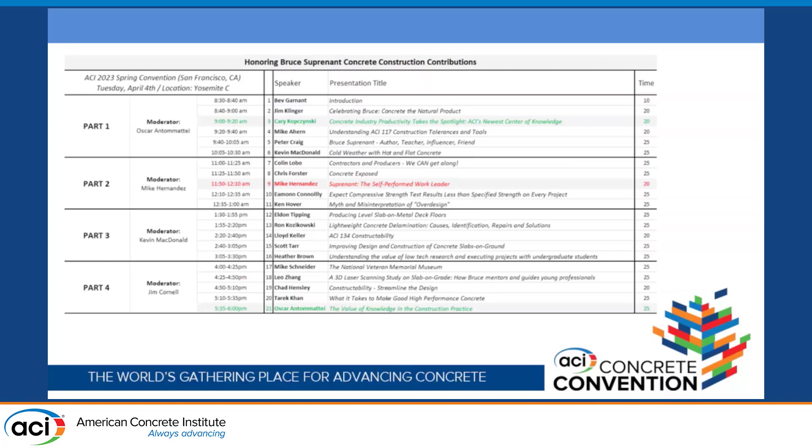We all know that concrete moves and behaves in mysterious ways, and so do careers in the concrete industry. For me, it's all been about luck. I learned early on that you always have to try to position yourself to get lucky. And the harder you work, the luckier you get.

I started out with Miller & Long Company. I worked at KCE Structural Engineers. I worked for Martin Middlebrook and Louie here in San Francisco, and then for Conco, a local contractor. Each step of the way, I was lucky to have people I was working for that had great situational awareness and excellent mentorships.

So the only regret I have, and I would tell that to any of the young people here today or the people listening at home or at the ships at sea, is not having the wherewithal or foresight to get involved with ACI earlier in my career. Everything else was all good, but that to me is of vital importance to somebody's career - to get involved with ACI and also ASCC.

Lucky again, World of Concrete 2017. I come walking into my first World of Concrete, and there's the ASCC booth, there's the classic Hawaiian shirt, and I made a beeline over, introduced myself to Bruce and said, you don't know me, we never met, but you have helped me out of so many dicey situations in job site trailer meetings. It's just unbelievable. So I just want to shake your hand and say thank you very much for what you've done for me. And then I'm not sure how it happened, but I ended up working for Bruce.

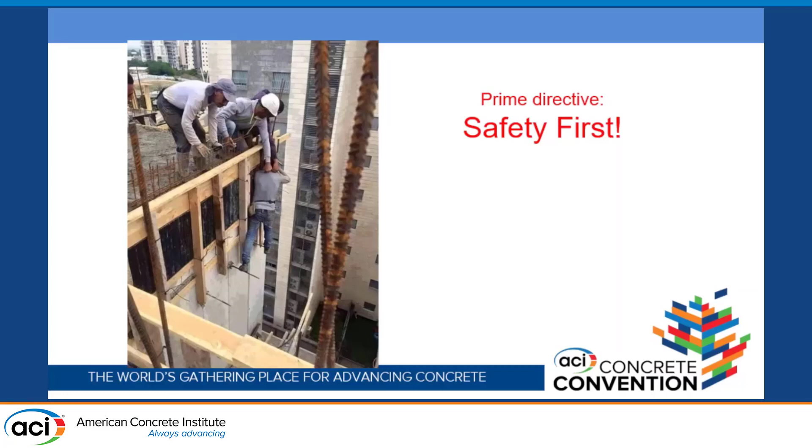Safety first. You don't ever want to be in this scenario in a concrete pour - as you can see, there's guys leaning too far over that handrail there. Have fun. Bruce always makes sure that at Christmas time we have enough Christmas cards and Christmas ornaments to go around.

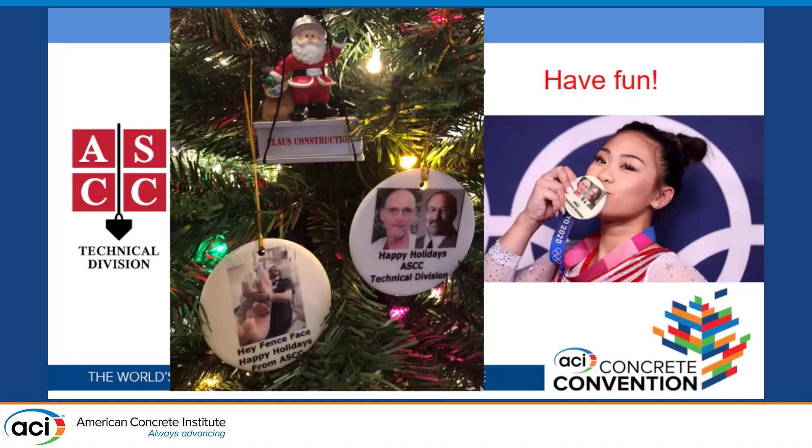Sometimes humor is at my expense from Bruce. Here I am in the hospital, I've got a spinal cord injury, I can't walk from the waist down, and the handsome face you see now is covered in blood and stitches. So what does Bruce do? I get a huge stuffed pig and a safety manual for bicycle safety. So thank you very much, Bruce.

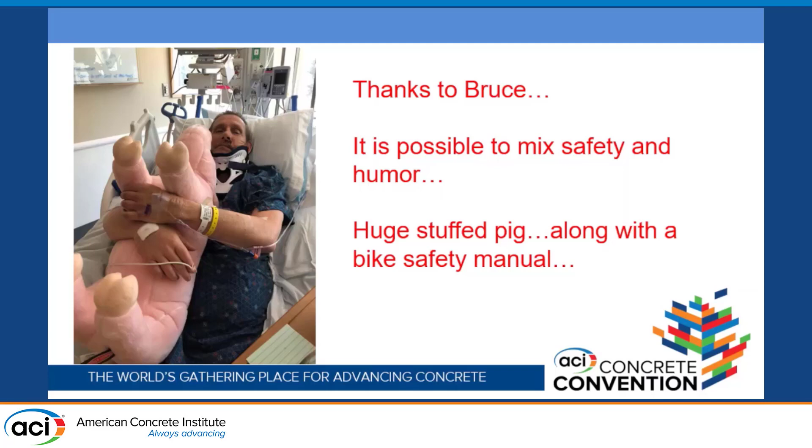It's a tough business. You never know who you're going to run into during a 10,000-yard mat pour, especially in downtown San Francisco. We're a city of inclusivity and diversity, and as you can see, all are welcome on concrete pours.

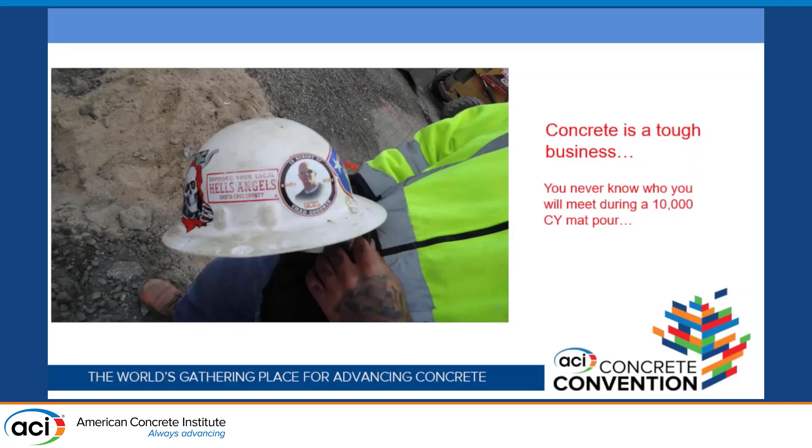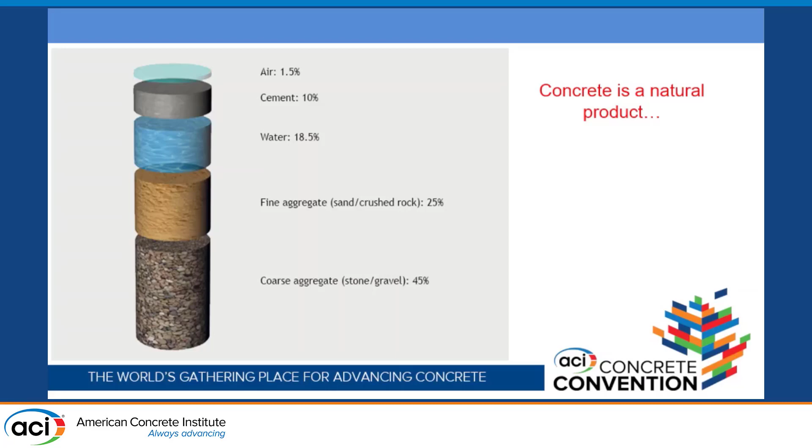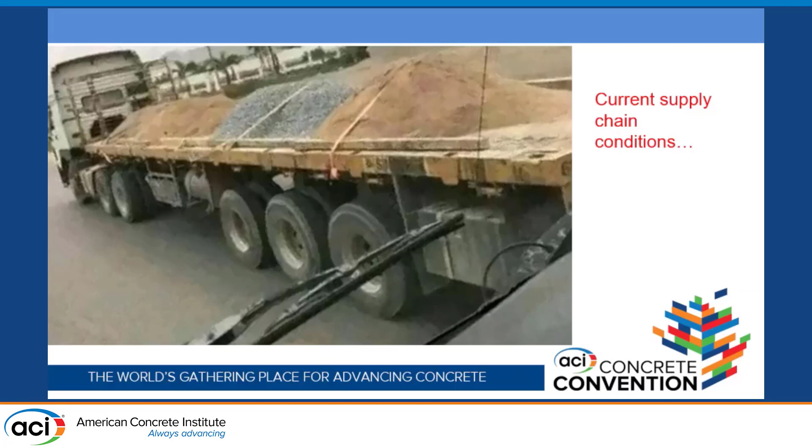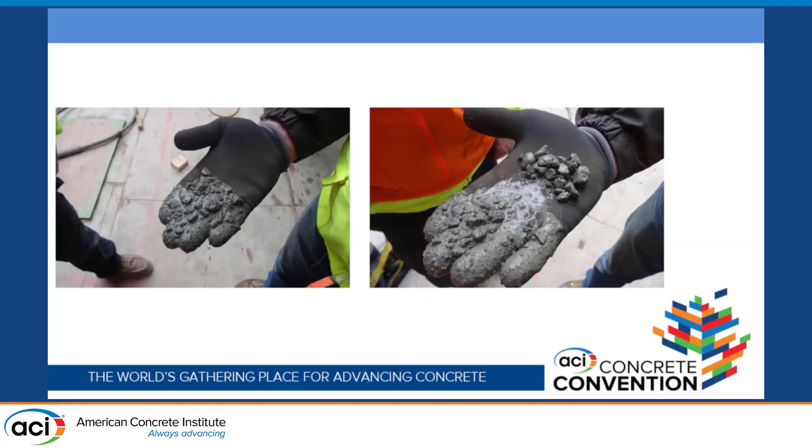Concrete is a natural product. You've got coarse aggregate, so we're recycling rocks. You've got fine aggregate, so we're recycling smaller rocks. Water, we recycle that. And then you have cement, some of which is recycled as well. So it's a natural product, quite simple. You can see in the supply chain, basically there are your constituents right there. All that's missing is the water, but on that day it was about ready to rain. So you don't ever want to be at the end of the concrete pump and find out what the constituents are by grabbing a handful and having it look like that. That's just rock, sand, water, and a little cement right there.

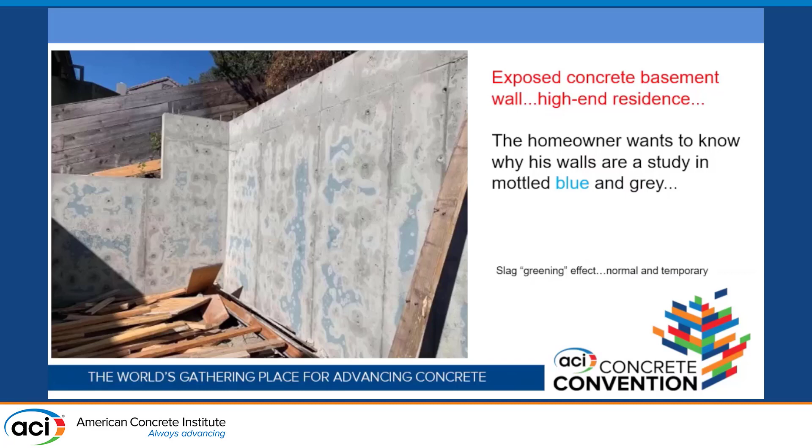This has slag in it. The first day or two you might see that on your wall, but it's going to go away. So just relax, it's called the greening effect. It's normal and temporary with this natural product.

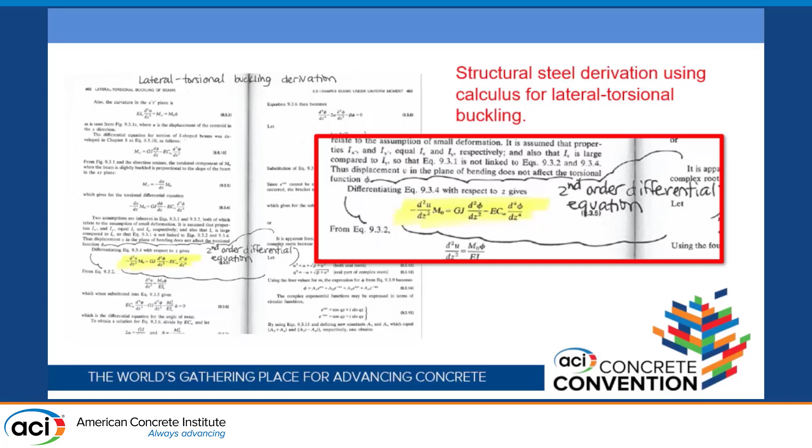For the steel guys, their design equations are pretty much all based on calculus. So here is the formula for lateral torsional buckling, it's a second order differential equation, and that's something they can do. Almost all their equations are based on calculus.

It's not that way with concrete. This was back in the days of slide rules and IBM punch cards when I was in school. Now all I can really think of is you got shear moment and a senior moment at my age.

What you got here is you take the dead load and you overestimate it by 40%. As an estimator, you try that, you get fired. You take the live load and overestimate that by 70%. Then you have some factor U, which is the strength of the building, which you usually fudge down by 15% or whatever the phi factor is nowadays, adjusted for inflation. I don't know, but...

One of the things that attracted me to ASCC was that they always challenge the system, look out for the contractor, and we help each other out. Another important thing is that we leave the party affiliation at the door when we come into a meeting. There are times other contractors here in the Bay Area are fierce competitors with us, but I can call them at any time, unless it's a job we're bidding on, of course, and we can discuss things and freely help each other out. That's one of the things we do, is we share with others.

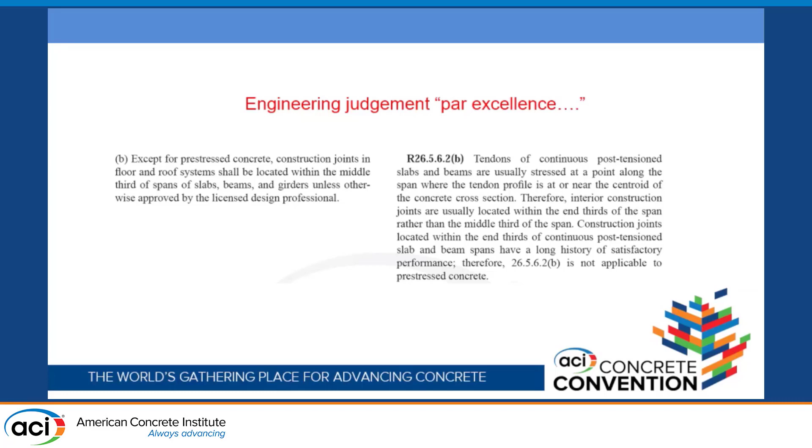We have collaboration with ACI, probably one of the better books around, for less than $100. Extremely valuable - it's got all of the legal, quality, and ASCC position statements in there. That was largely from Bruce and his contribution to that.

Here's a study in two classics, Bruce style. This is a building that maybe some of us will see here in the fall. It was a high-rise steel building, and they topped it out. They ran the building skin, which was plate glass windows, and then all of a sudden the windows started falling out, crashing into the street, and they were replaced with plywood. So that building became known as the Plywood Palace. And then, upon completion, it's a tall building like this.

So there was a big investigation, lawyers, non-disclosure agreements. Nobody was allowed to talk about it. What was going on? Was it the windows were failing? And so on. They finally came up with some kind of an idea. But then somebody said, wait just a minute, guys, there's something else going on here. And Bruce would say, 'Hey, I don't do windows, look again.' It turned out that the building was actually in danger of collapsing under wind load. And you say, okay, I get that.

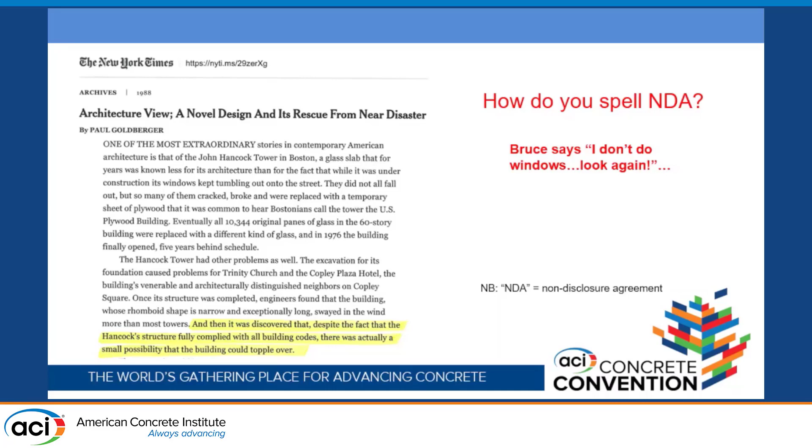It's a tall building like this. If you ever tried to carry a piece of plywood in the wind, you'll see that the wind is something to be reckoned with. Only in this case, it wasn't what you thought. That building wasn't in danger of failing this way - it was in danger of failing that way. So a lesson learned from Bruce: it's not always what you think. Always take a second look.

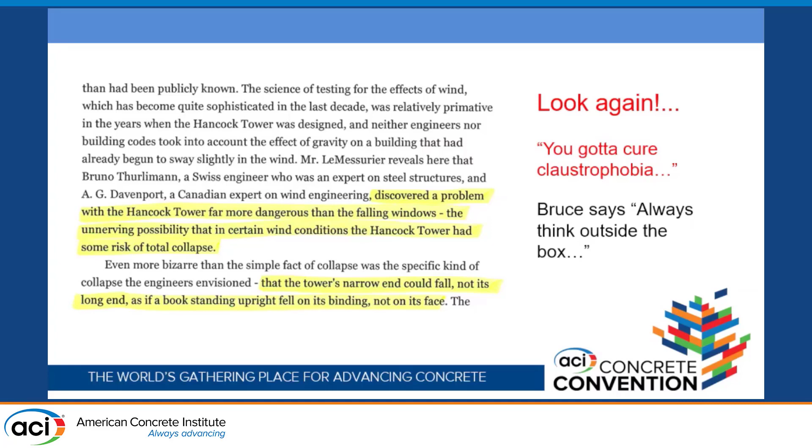A good way to cure claustrophobia, in other words, is you always got to think outside the box.

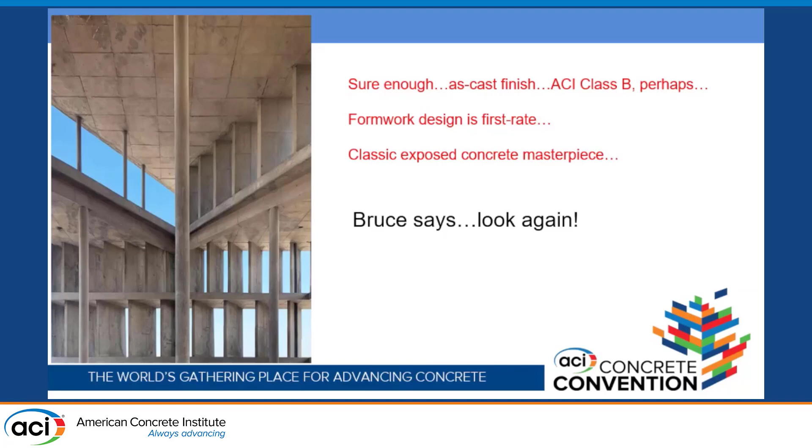Yeah, Bruce, looks okay. So let's take a look inside. Say, man, look at that - the formwork guy, his lines are all nice and plumb. You see a little bit of patching, but not much. The guy that designed this was insistent on exposed concrete, natural concrete, and he would berate the workers when they stripped because they were starting to patch the concrete. But Bruce says, no, look again.

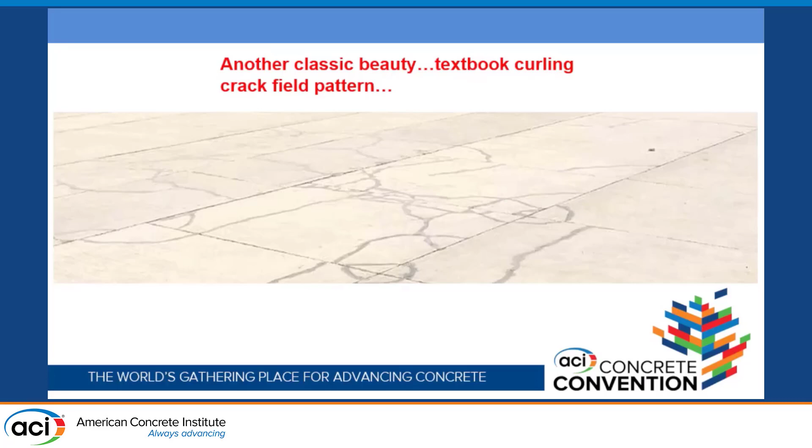What do you see? And I'm saying, well, I see this building there, Bruce. And he says, no, down here, look at that. Okay, look at this - this is beautiful, it's a classic beauty. Textbook curling, crack field pattern. All these corners here have become a cantilever and popped - all four corners. And then here, almost a perfect circle right here. You're never going to see a better example of curling in your life.

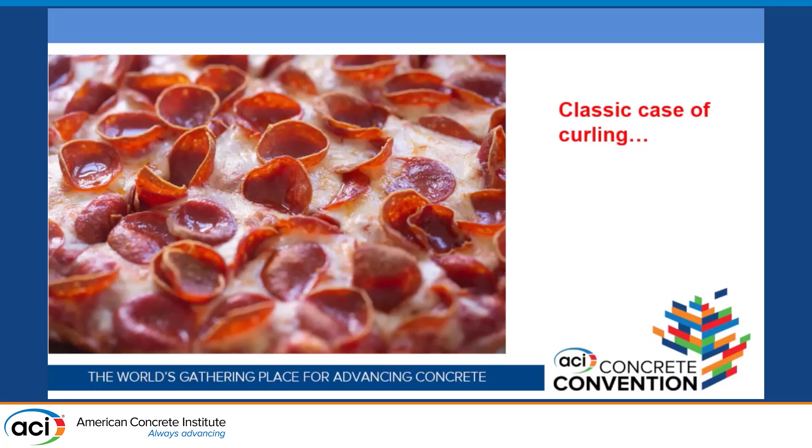And I thought, my God, what a magnificent picture. So I got in touch with the fellow - his name is Rod Rankin. He's an engineer in South Africa. And I asked him if I could use this slide in my presentation, and well, it's for the same reason. So Rod emails me back and he says, 'By the way, send my best wishes to Bruce. I've never met him in person, but I've been an avid reader of his articles on concrete ground slabs for many years.' So there's fan mail from South Africa for Bruce.

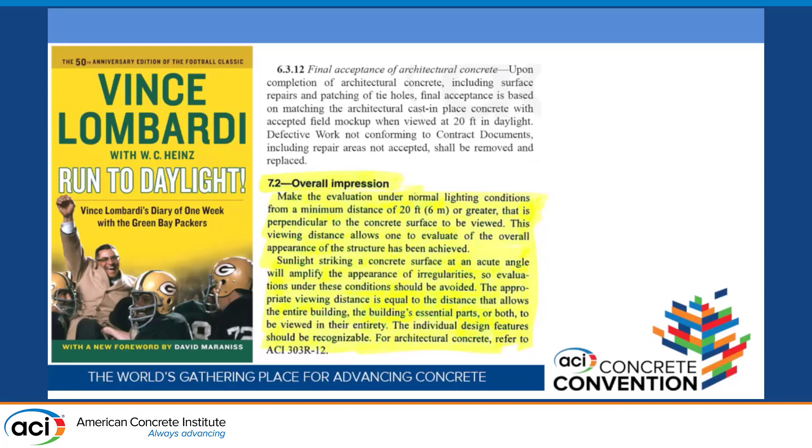ACI 301, we quote that quite often—I call it the Lombardi rule. That's for the architects and reviewers of mock-ups who like to get out their magnifying glass. Fellows, not so fast—this has got to be viewed at 20 feet in daylight, hence the run to daylight of Vince Lombardi. We quote that rule often to get people to understand this is a natural product; it's going to have a divot here and there. Get back 20 feet.

Collaboration—this is from Bruce's library, his first notes for early position statements. He was able to get people in the design offices and in the field all on the same page across all different trades. A lot of that work was eventually turned into position statements, articles in Concrete International, or Concrete Q&A, and so on.

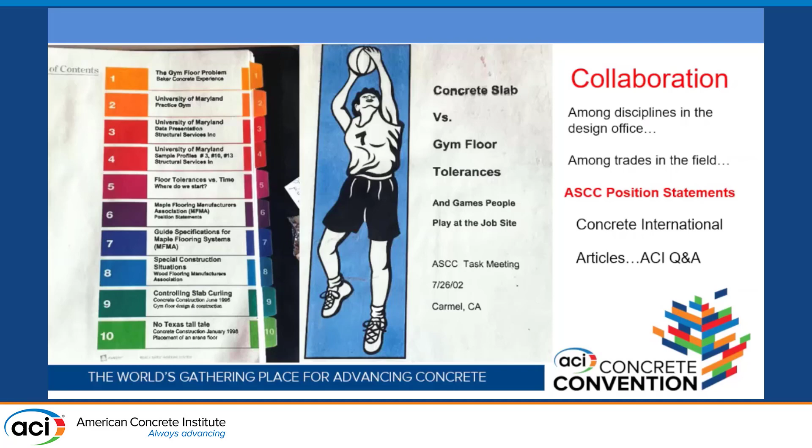One of the most notable collaboration items Bruce was responsible for was getting all of the flooring contractors and follow-on contractors on the same page. Everybody here knows that's a contractor—you pour a slab in January, and then in November you get that phone call: hey guys, the follow-on guy's here to put his flooring down, and he's not accepting your substrate. And you say, well geez, this is something we can't control—what happens to that slab nine months after we've placed it.

By rules, by ACI 117, the testing for flatness and the quality of our work has to happen within 72 hours. So don't be calling me nine months later.

Finally it dawned on everybody, thanks to Bruce getting everyone together, that any repairs needed for a floor surface really is something the owner should carry an allowance for, because the concrete guy can't control when the flooring contractor comes in. And it's not the flooring guy's issue either—he's showing up expecting a certain quality floor. So thanks to Bruce, he got all these trades together to stamp this position statement and say, you know what, this is a legitimate allowance item for the owner to carry.

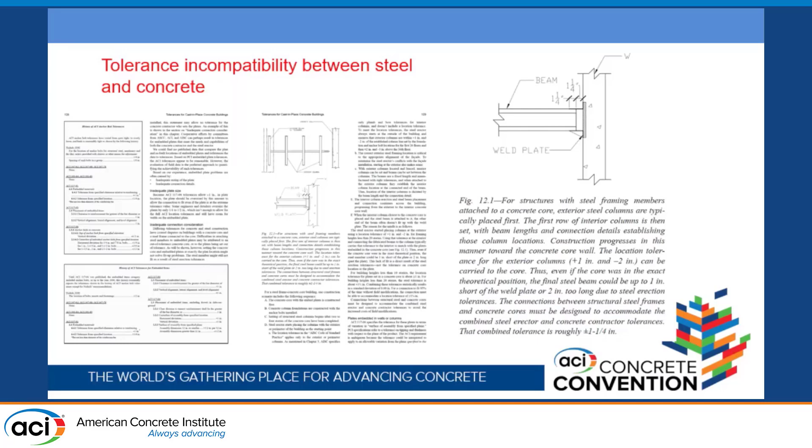There's another issue with anchor bolt tolerances, and Bruce got together with the AISC and ACI, sat everybody down, and came to an agreement on what constitutes reasonable tolerances for anchor bolts. So another example of collaboration among trades and disciplines.

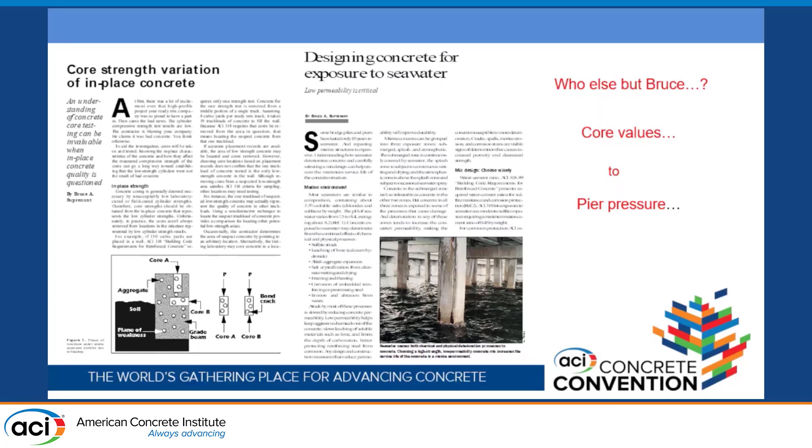Who else but Bruce to run the whole gamut from cores to submerged piers—quite a varied repertoire there.

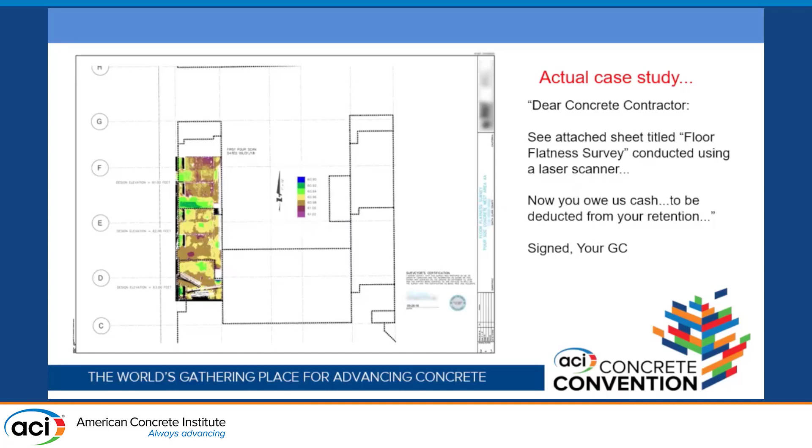At that time, because of that emerging technology, Bruce had the foresight to say wait a minute—if this is going to be used to judge the quality of our work against our tolerances, then we need to get ACI 117 involved. Which now, of course, has the 117 sub-L subcommittee for laser scanning, which Leo is now the chairman of.

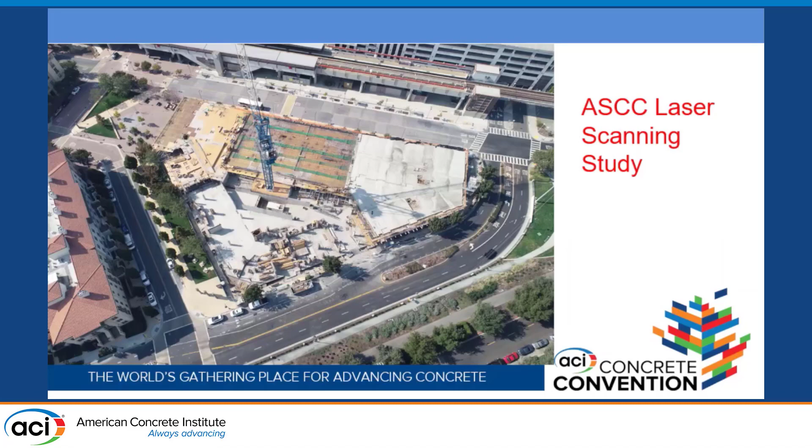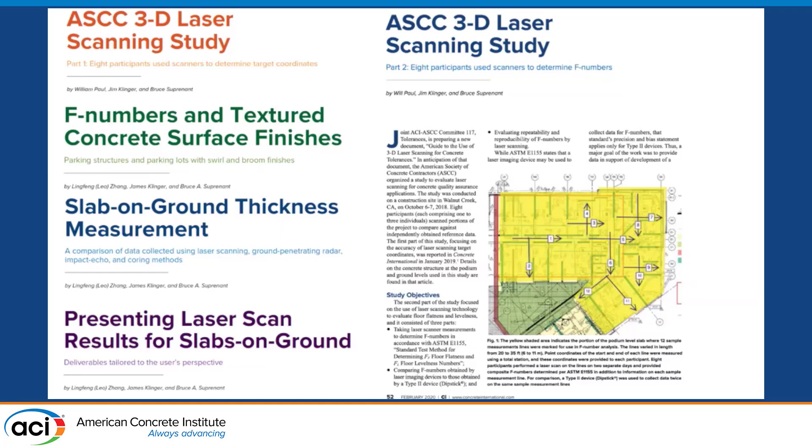So we did a study in Walnut Creek. We had 8 teams of different laser manufacturers. We had a freshly poured slab here, poured the day before, and another slab that was several months old. We had the teams alternate between each slab over a 2-day period. That study and one other became a series of articles in Concrete International magazine that let everybody know what the technology is and how best to deal with it.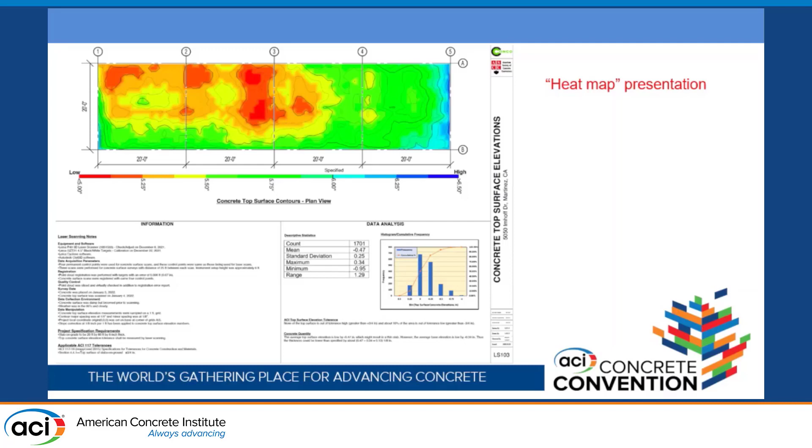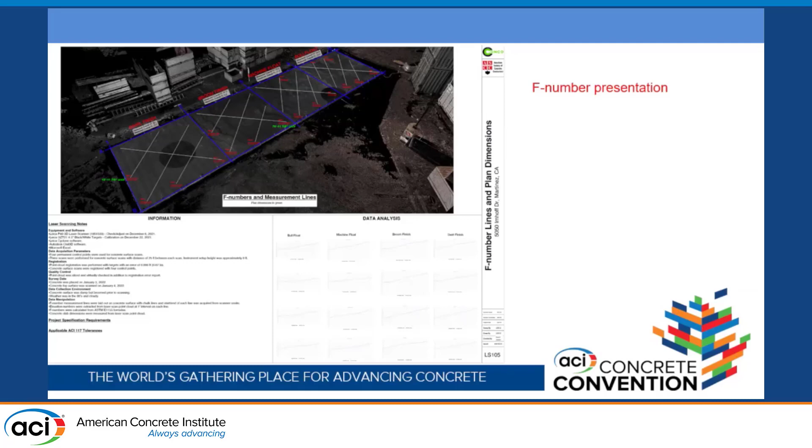Also, for the presentation of the heat map, we had Leo prepare a protocol for how to properly present information to somebody. If you're going to tell them that the quality of their slab is good or bad, you should at least have some basic information in there. This was in Concrete International magazine, and for reporting F numbers, there's also a protocol that should be followed. You just don't send somebody a heat map and tell them that they owe you cash.

Here's another thing, concrete's a natural product. When you read architectural drawings, you always want to look at the deflected ceiling plan to see what's planned there.

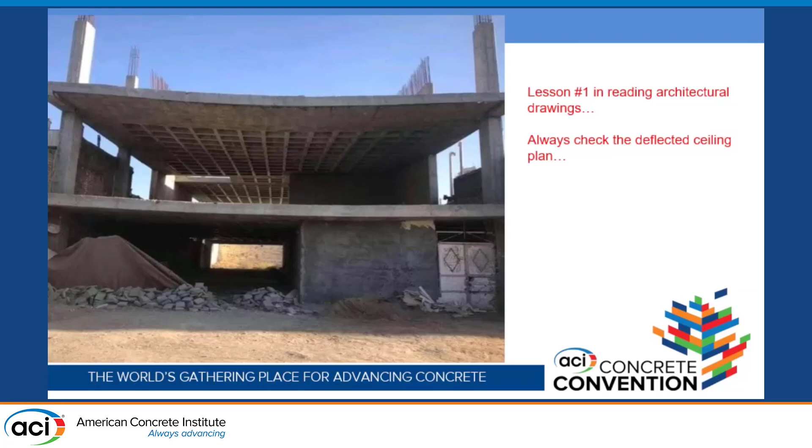For steel guys, it's pretty simple. You have a point load, and it's pretty easy to see. If the length is 1 and the deflection is 1, if the length is 2, you double the span, the deflection is now 8. That's 2 to the cube. Think about it: if 2 guys are standing with a number 4 bar 20 feet apart and it deflects an inch, if you double that span and they're 40 feet apart, the deflection is going to be 8 times that, or 8 inches, and that makes sense.

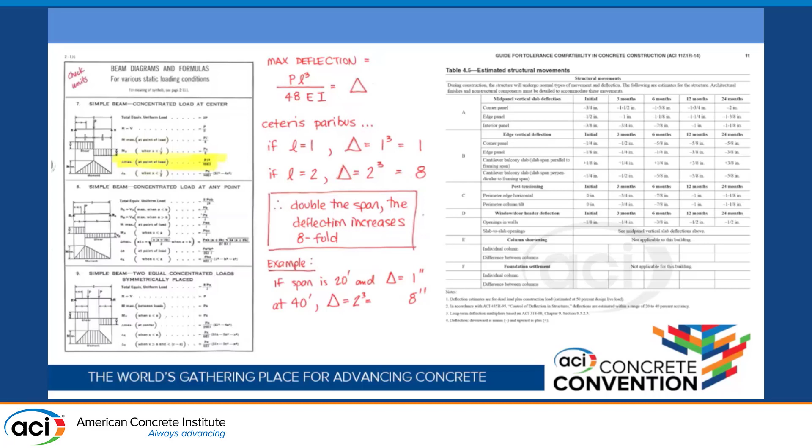Not so with concrete. With concrete, in 117.1R there are expected deflections over time, and deflections are estimated within a range of 20 to 40% accuracy. Why? Concrete's a natural product, not as predictable as steel.

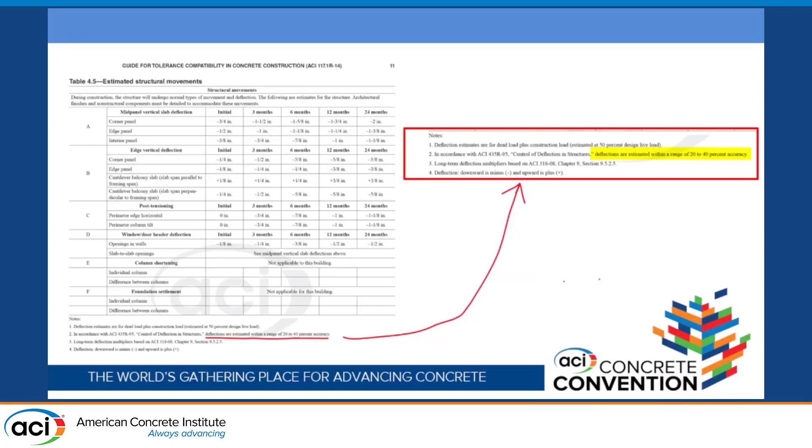Okay, we have Cary Kopczynski. He'll be speaking to you here pretty soon about collaboration.

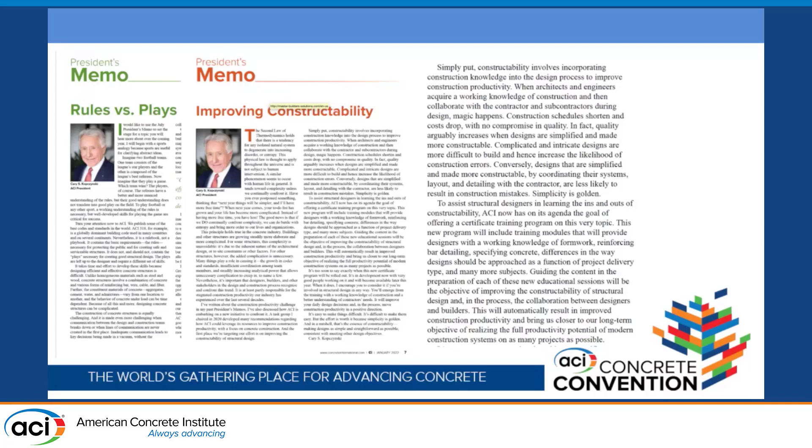These two president's memos were very significant to me because it's the first time I've really seen from the design side somebody talking about constructability and trying to find out the business from the contracting side. That was something I really enjoyed seeing.

Right now in 117, you have collaboration. Meetings are mandatory, but you don't have to bring the engineer or the owner. Now in 301, if it's specified, you can get the engineer and the owner involved. But then the AIA documents kind of prevent that because they don't want the contractor speaking directly with a designer. As a result of collaboration like that, you see special notes to owner on structural engineers' drawings now where it says, hey, Mr. Owner, concrete's a natural product, it cracks, it moves.

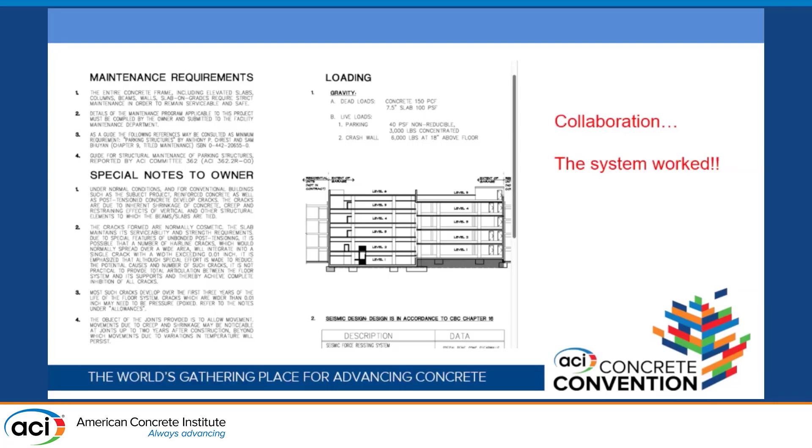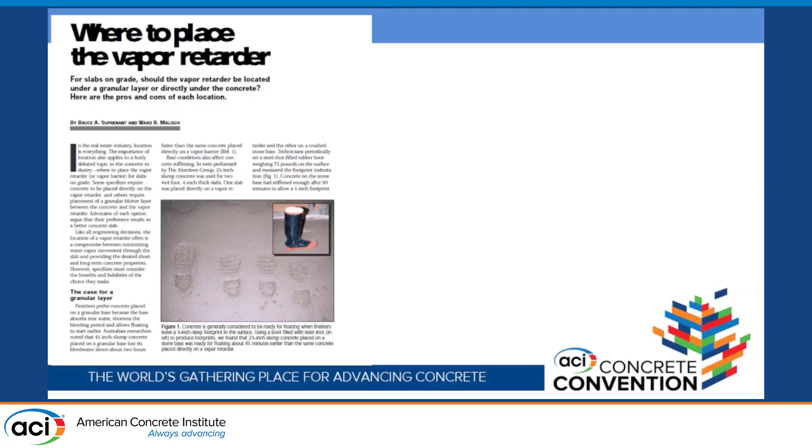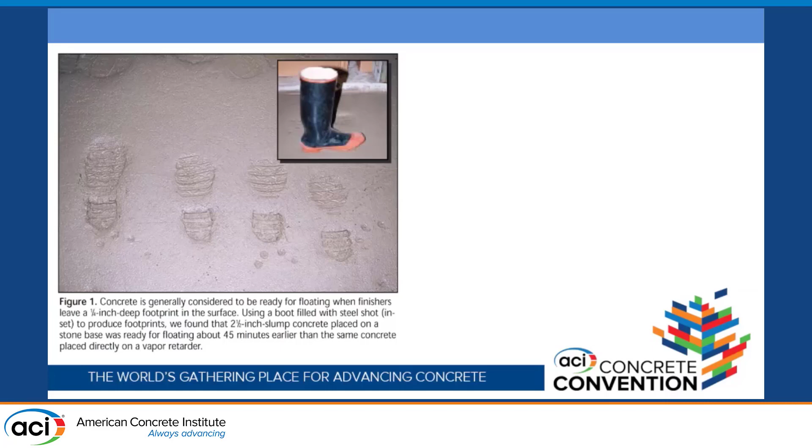So I'm going to have to blaze through these. The last one here is Bruce wrote an article about where to place the vapor retarder. I get a call on the hotline, and the guy says, hey, I'm not an ASCC member, but I need to know, are you sure that's right? I said, well, yeah, Bruce wrote it, and pretty much trust him. And he says, well, wait a minute, what you're showing me here, if I do that, you're going to guarantee that my work is going to be good. I said, yeah, sure, he's got a license, I'll guarantee you against his license that this is the way to do it right here. And the guy says, well, good, because I'm going to send you the bill, because I did just what he showed me right there.

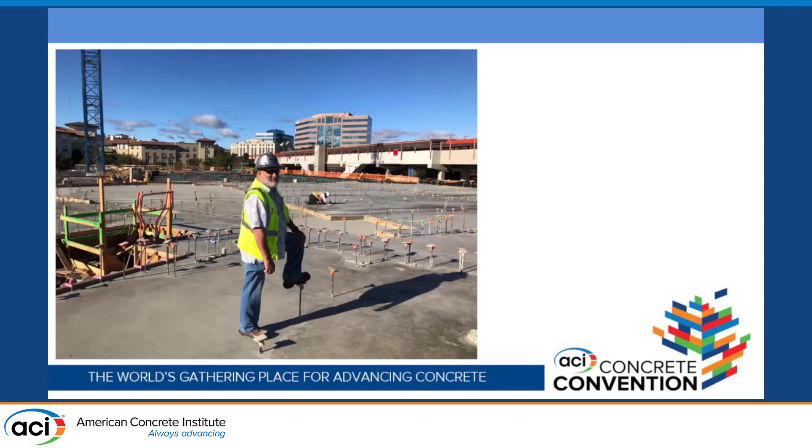So Bruce, thanks a lot. You've been kicking ass and leaving footprints for many years, and it's been a pleasure working for you.